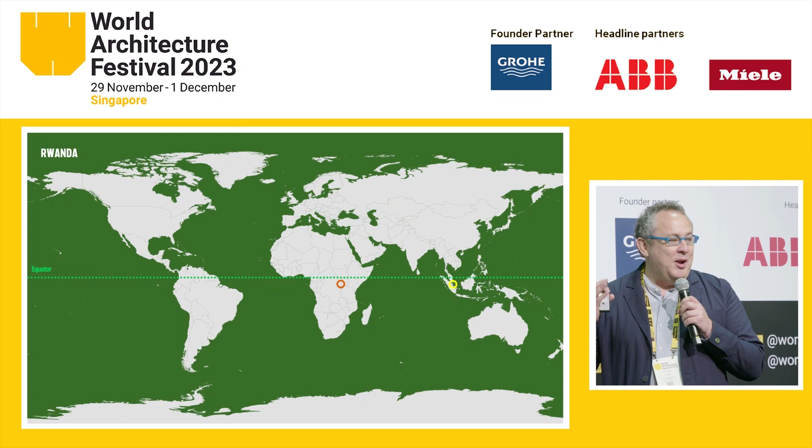So just a quick reminder of where Kigali is. It's on the same latitude as Singapore, but at 1,500 meters up, it enjoys a beautiful climate where you can naturally ventilate all year, with a 20 degree diurnal average temperature over the year. It's a country of 1,000 hills, Les Mille Collines, effectively a series of very valuable plateaus, some challenging slopes to build on, and then at the base, a series of protected wetlands, which are stunning natural habitats of bird life and plants, and support some agriculture. The City of Kigali itself has 11 of those hills, one of which we've been given to master plan as part of the Green City Kigali.

And so when you look at that global need, let's have a look at the local need. Rwanda is going to develop up to 2050. There's a government plan to get there, and its population will double by that point to 22 million people. And most of those will be going into the 3 or 4 urban centers within the country.

It contributes 0.003% of global greenhouse gas emissions, yet it suffers some of the worst effects of it. It already has extended dry seasons. It already has terrible flood events. It's landlocked, and it has limited resources to produce construction materials. Anything that gets brought in is massively expensive.

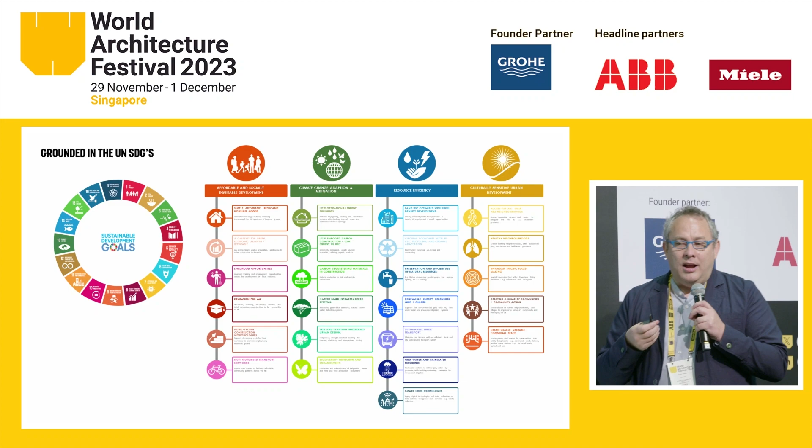So the first part of the project is to develop a master plan for 600 hectares. The hill itself, Kinyinya Hill, is occupied by a mixture of informal and formal settlements, some planned housing estates, informal and formal infrastructure. So we've called this a bottom-up approach to rapid urbanism, and part of that is looking at what the assets are on the hill that we can use, amplify, and develop from, rather than a carte blanche approach.

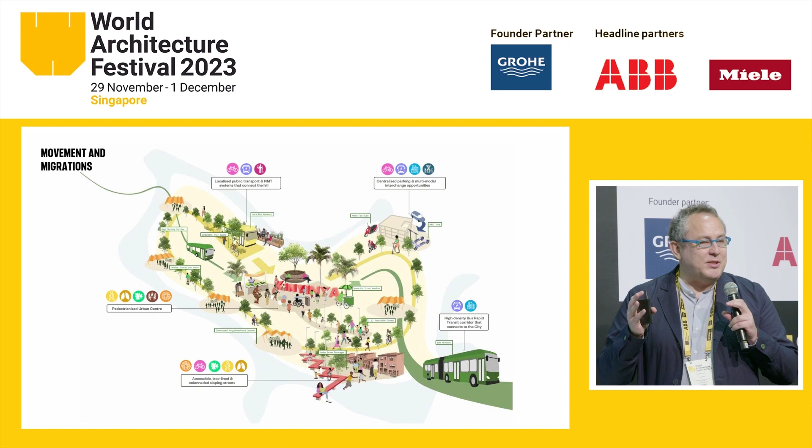So this is looking at movement and migrations. There's a road network that can be established to create what we call a circular bus route around the hill. We have a very challenging opportunity to put a BRT through the site, and again that's part of linking it back to smart cities. So finding the land between all these complex land ownerships that we can take a 30, 40 meter right of way for a BRT route through the site is very challenging.

And then this sets up a series of sub-communities across the hill. So the hill is going to have 170,000 people on it, so it's seen as one centre but also sub-centres. And so this is one of those, and there's commercial activity activated around the transport nodes in each of these.

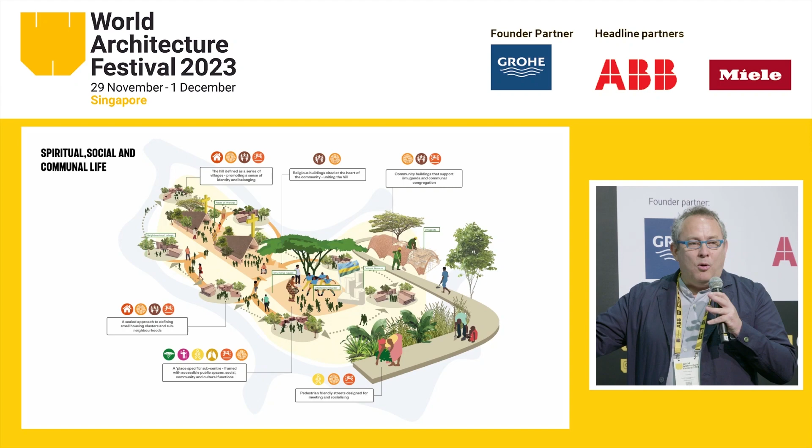Next one is spiritual, social, and communal life. Where do people get together? So at one scale, this is around creating pedestrian-friendly streets where people can meet. It's around creating community centres in each of these sub-centres. It's around creating religious buildings along the spine of this hill where all these different communities can come together. And here's a view of one of these local community centres where people get together, for instance, to plan what they're going to do for the Umuganda process.

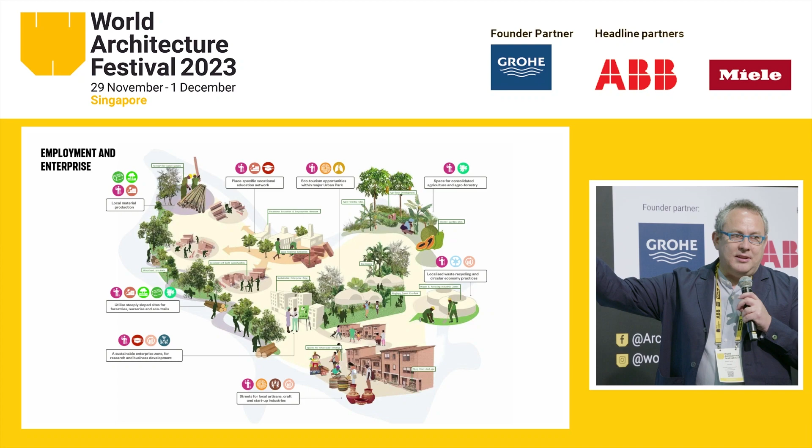Employment and enterprise. So the idea is we keep as many people working on the hill as possible. We've established space standards to support 55,000 jobs, from light industry through to small entrepreneurial spaces within the different settlements. But it's also looking at the assets on the hill. There's some forestry that can be used for intense agroforestry. There's some of the best clays in Kigali on the north side of the hill, so we can establish brick making and construction technology as well.

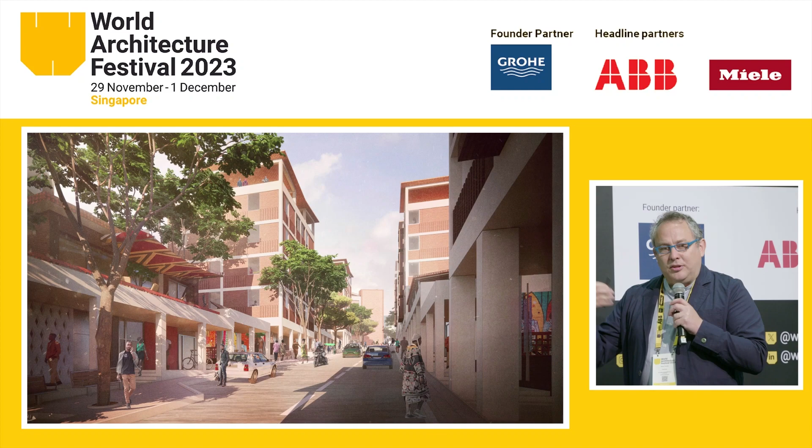And this is that idea of a street-based urban development with colonnades, spaces that can be anything from someone wanting to sell fresh water or milk through to cafes, through to using them as bonded warehouses almost.

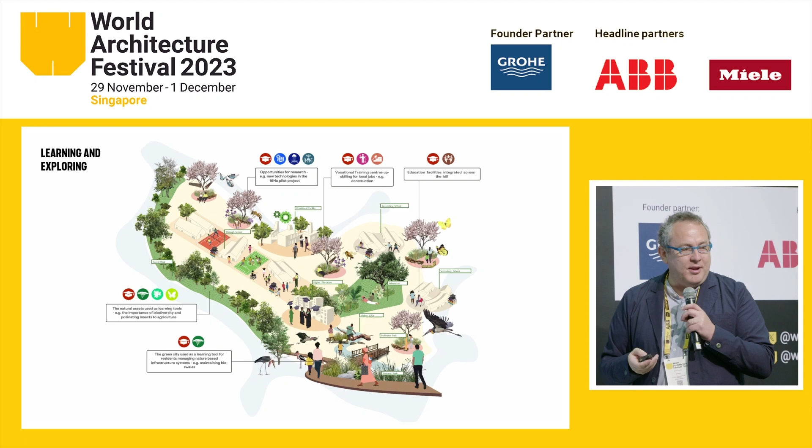Learning and exploring, making sure we have enough schools is absolute fundamental on this site, but it's also the nurseries, the primary schools, the TVETs, the universities. We have an incredible biosphere on the site, the Deutsche Welle site, which hasn't been touched in tens of years, and it's just been allowed to grow, and it's the most native forest in the whole of Kigali. So preserving that in the middle of the site as a research piece for the university is super important to our proposals.

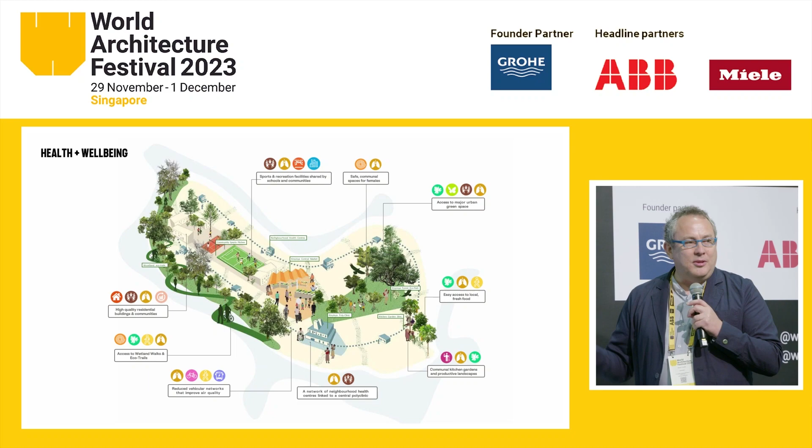And these schools are not just schools, they're community centres. They bring different neighbourhoods together, and again, there's out-of-hours use for adult education. Health and well-being, making sure we have the hospitals on the site, again to support that social infrastructure, but also that whole story of people walking and cycling to work.

And making sure all of the places that we create through the sites are pedestrian friendly, and that people can navigate what are between 1 in 6 to 1 in 8 slopes in a casual way.

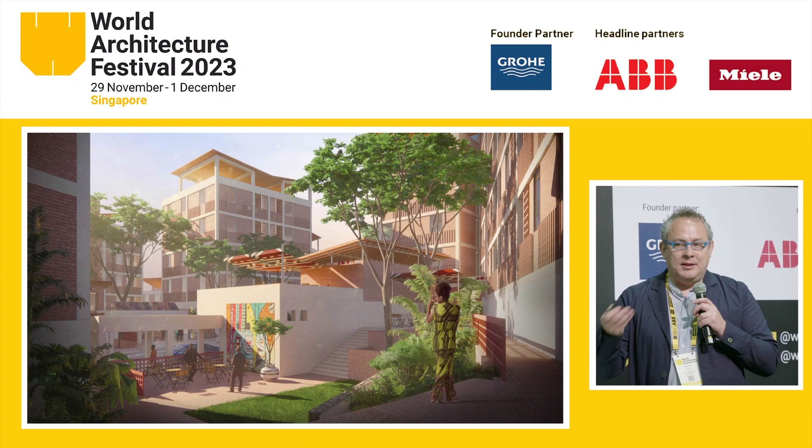So overlaying that as some sort of structural pieces, we have green infrastructure. This is around blue-green social networks that double up as agricultural spaces, but also deal with floodwater on the sites and extreme weather events, and how we attenuate stormwater running off the sites into natural detention basins at the bases.

There may be something about how smart cities can be applied to this, so that Umuganda process may be about, for instance, desilting some of these bioswales next to roads as part of the community action, replanting them.

This is the eco park I talked about at the middle of the site. The BRT, it's not just a hard highway through the site, it's actually a linear park that links one end of the hill to the other.

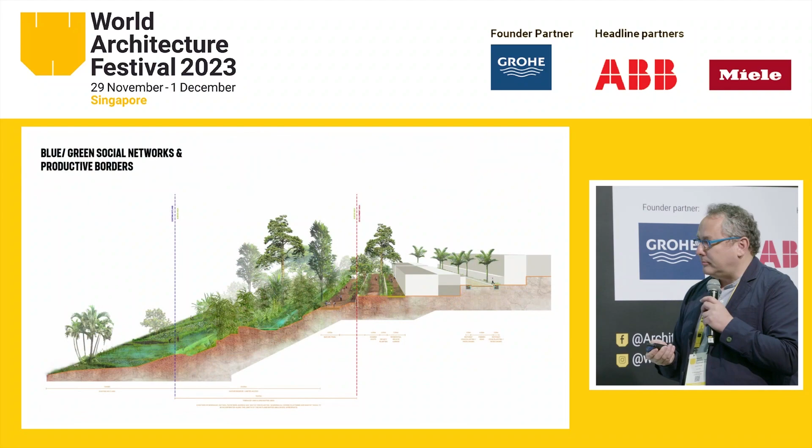And then what we call blue-green social productive borders. These are strands of green that run through the master plan and help define these individual settlements. But they provide the peri-urban agricultural space. They provide the space that we can slow stormwater down in. And they're all overlaid over the natural conditions on the site, so they exist with the existing hydrological routes.

And then we have a series of layers of the master plan, and then the master plan itself. So we're at a point where we're consulting with the city of Kigali on this and the adoption of that. Part of that master plan is setting out - the city has a sort of smart cities agenda with a series of checklists. Part of our submission, over a sort of 400-page master plan, is how this can be developed over time and delivered up until 2050.

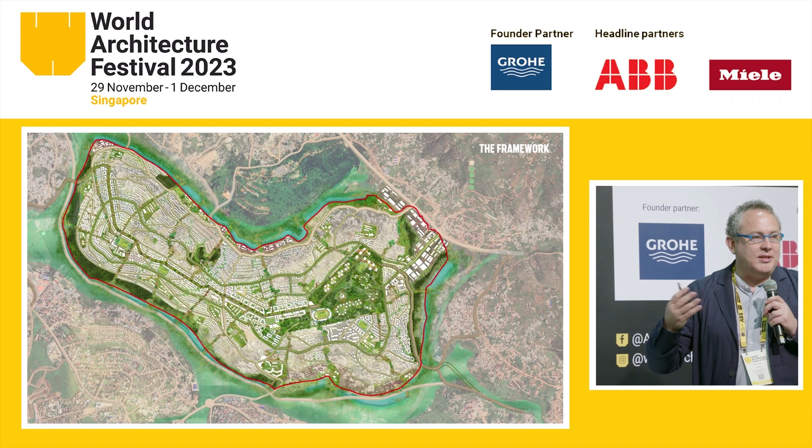So I'm going to stop here. There's a bit more to the presentation, but I think we'll save it for tomorrow.

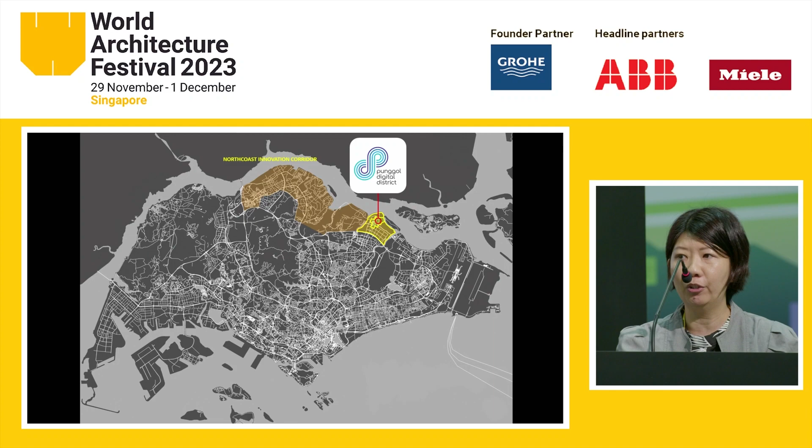Today I'm presenting on the Punggol Digital District Master Plan, or PDD for short. PDD is developed, or rather the district is part of the North Coast Innovation Corridor that is planned as Singapore's new decentralized economic center. PDD is developed as a 21st century prototype of regenerative and resilient innovations.

It is the first of its kind to be implemented in Singapore at such a scale. The 50-hectare master plan embraces a systems thinking approach that holistically integrates its various parts to prioritize people, nature, and sustainability. It brings together a business park, a university campus, key public spaces, district-wide services, and major public transportation nodes.

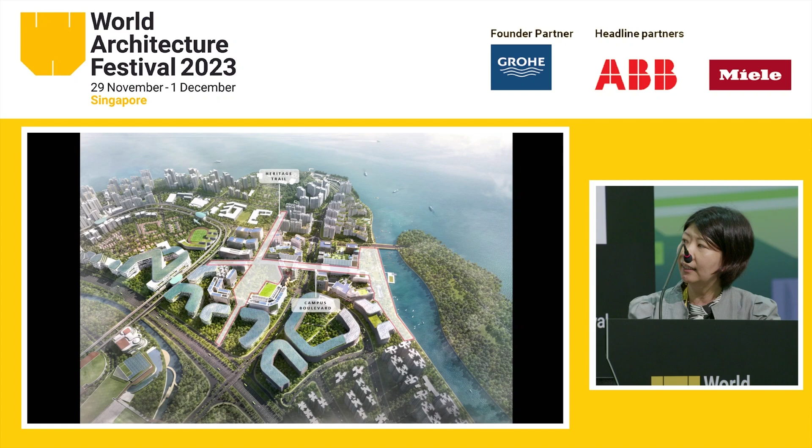Two key pedestrian spines stitch together the entire district. In the north-south axis is a 1.3-kilometer tree-lined heritage trail, this is the former Punggol Road that will become pedestrianized. In the east-west axis is an 800-meter-long campus boulevard. This is a pedestrianized street as well, activated by social nodes and shared amenities leading towards the waterfront.

Surrounding the district is a mix of public and private residential estates. And right in the heart of PDD is a public park that we have conserved.

The district is imposed with a technical height control limit, and to turn this constraint into an opportunity for sustainability, we have developed this innovative inverted skyline parti. This is the reverse of a traditional bell curve skyline, which tends to be problematic for solar collection.

So the inverted skyline establishes a common roof datum across the entire district, and this creates a contiguous surface to optimize productive rooftop systems. The elevated buildings also help to keep the community spaces below open and breezy, enabling better engagement with the park.

The inverted skyline is further organized based on a three-dimensional layered planning approach, and the different uses are integrated vertically, which optimizes land use and generates vibrancy. Resiliency is also built into the master plan by integrating rooftop PV with urban farms to test bed Singapore's solutions for energy and food security.

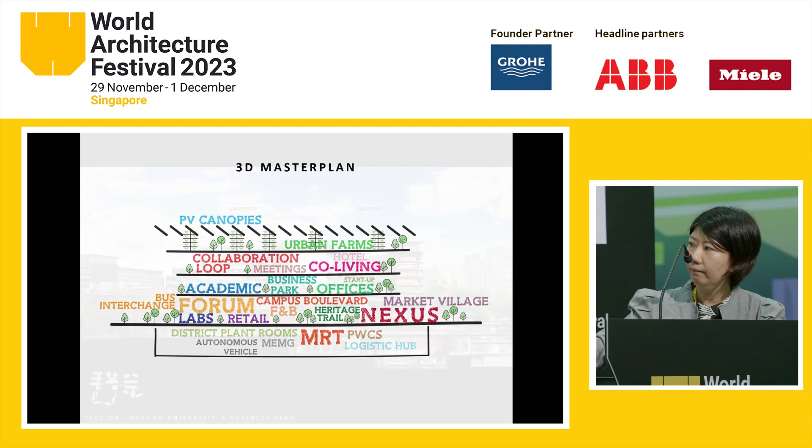The layered strategy places the district-wide services underground, and this segregates vehicles from pedestrians to create a car-free, fully walkable district. This section shows the 4 layers of the master plan, beginning with the vehicular and servicing layer below, overlaid by the community park layer. Next is the office and academic layer, and finally on top we have the sustainable tropical umbrella layer.

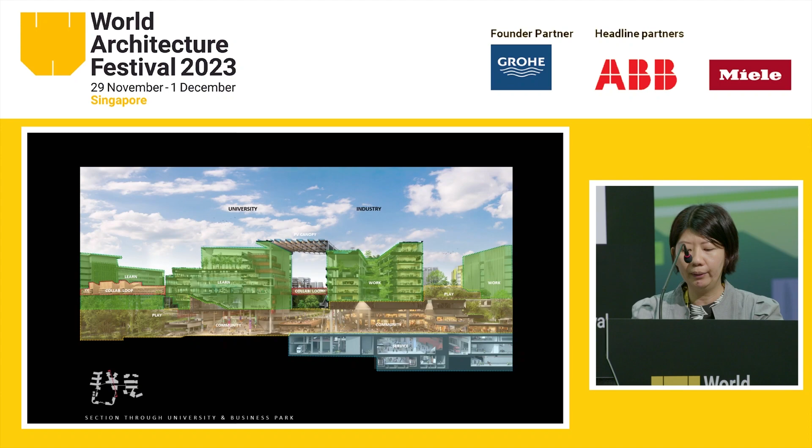Let me spotlight some of the key spaces in this section. On the left is SIT, and on the right is the business park. Within the basement at the bottom is the underground train station. Over that is the Nexus, a civic space that is linked to SIT's forum on the left. Mid-level linked bridges connect the various garden, work, and study spaces, and right on top we have the rooftop PVs.

I'll now like to focus your attention on the shared pedestrian street in between SIT and the business park.

Oh, sorry, one back.

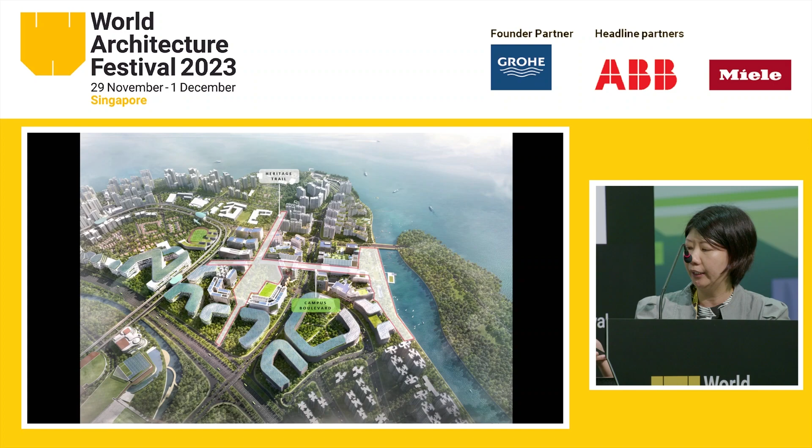This is the 23-meter wide landscape campus boulevard, a shared mobility path activated by commercial and community spaces. The campus boulevard starts with an urban plaza, activated by a bus interchange, a hawker and community center. It also intersects with the Heritage Trail.

The boulevard then transforms into a land bridge over New Punggol Road. It features sheltered public spaces, commercial and community amenities on both sides. Its endpoint is marked by a promenade plaza that engages with the waterfront market village.

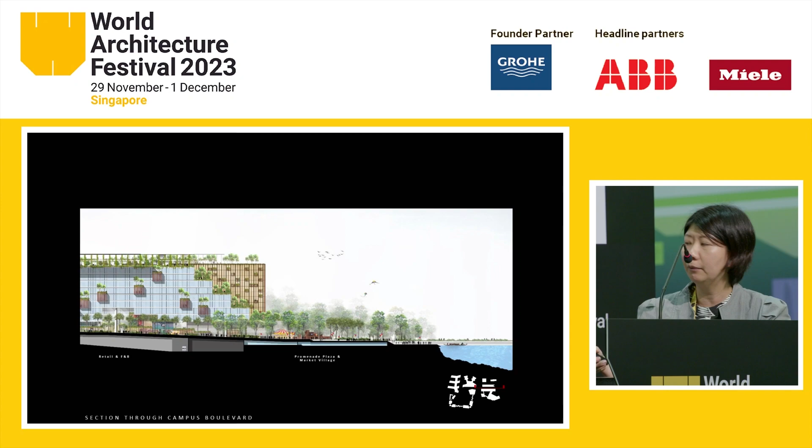I'll now take you on a walkthrough of the key spaces of the boulevard. This is the urban plaza that anchors its western end. It receives people from the light rail, the bus interchange, and the surrounding residential estates.

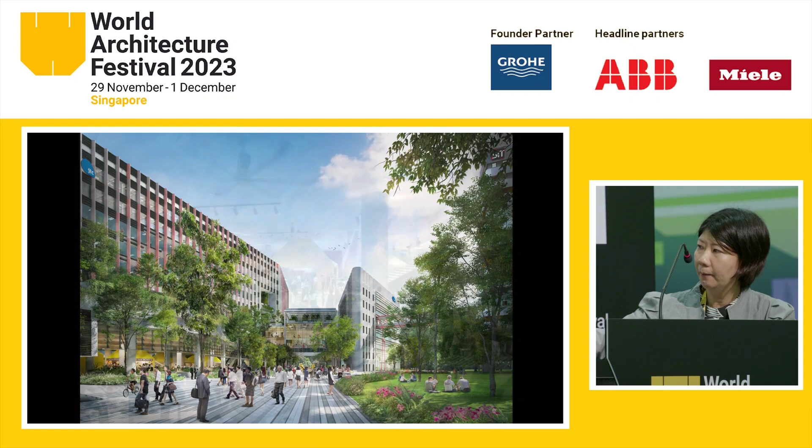Seen on the left side is the community hawker center, and this is the interior view of it. It is designed to be bright and breezy and will be operated by a public local agency to provide affordable food for the masses.

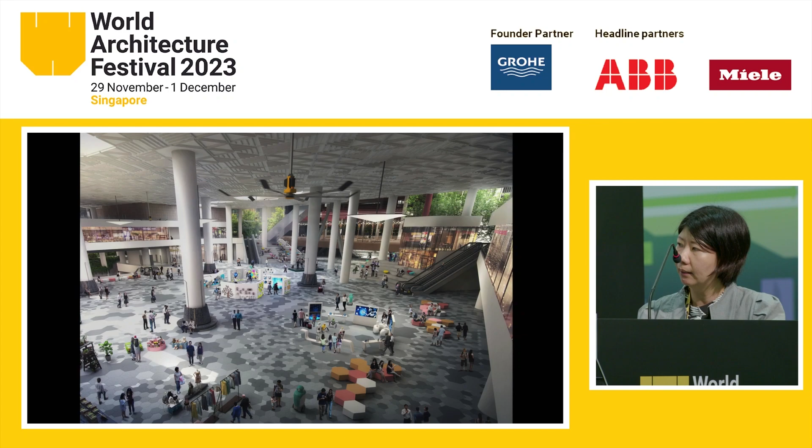Moving along, the Nexus is the civic space within the business park. It is a sheltered 24/7 open public space above the train station, activated by retail and F&B. The Nexus is linked to the SIT Forum, which is also a sheltered, naturally ventilated event space.

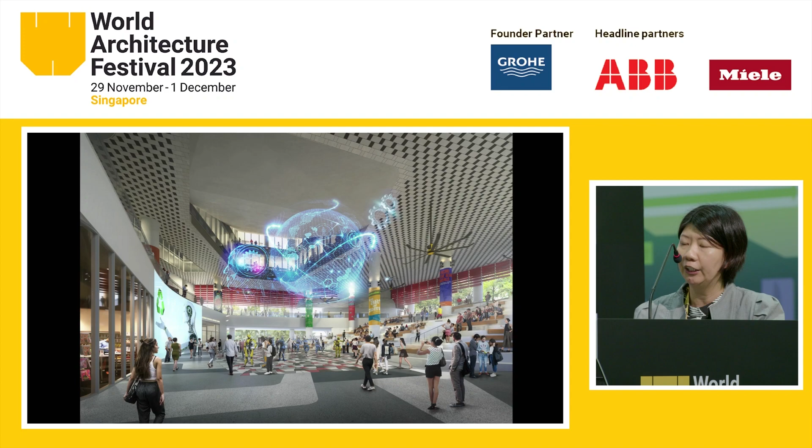Roof canopies are extended to shelter parts of the boulevard, making the outdoor spaces thermally comfortable. And finally, at the east end of the boulevard is the destination market village along the waterfront.

Now, the 3D master plan is facilitated by its interconnections, which is also fundamental to enabling the smart district. Vertically, escalators bring people quickly up into the buildings, which reduces the demand on lifts. Within the buildings, social amphitheaters promote active mobility by encouraging people to take the stairs.

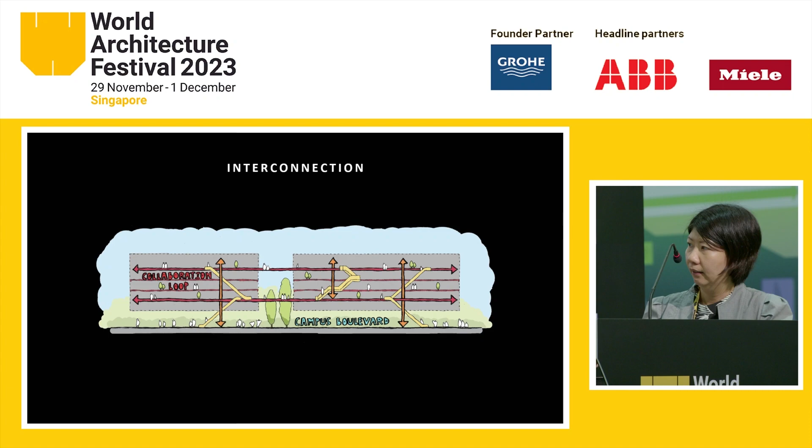Horizontally, an elevated pedestrian loop named the Collaboration Loop is introduced at mid-level to link up the entire district. The loop fosters a culture of interaction and exchange, and also supports a physical swapping of spaces between industry and academia.

This extended section shows how the escalators take people up quickly from the community park level to the Collaboration Loop, where social amphitheaters invite them together.

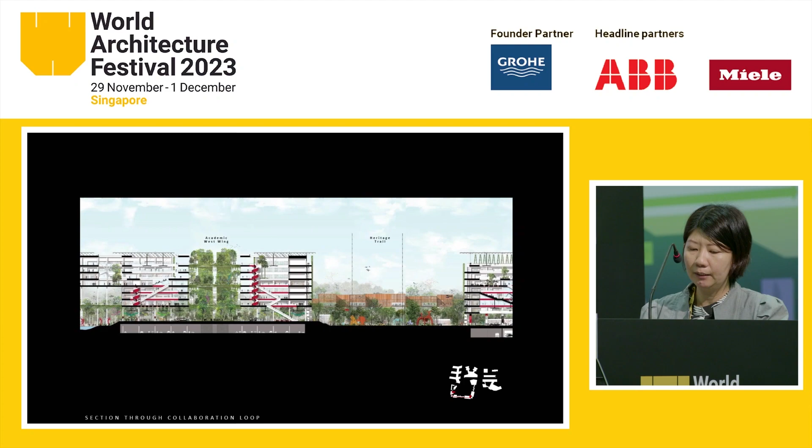Here, the loop crosses over the Heritage Trail, where there are study spaces that overlook the park. Link bridges connect SIT's campus and JTC's business park, fostering partnerships.

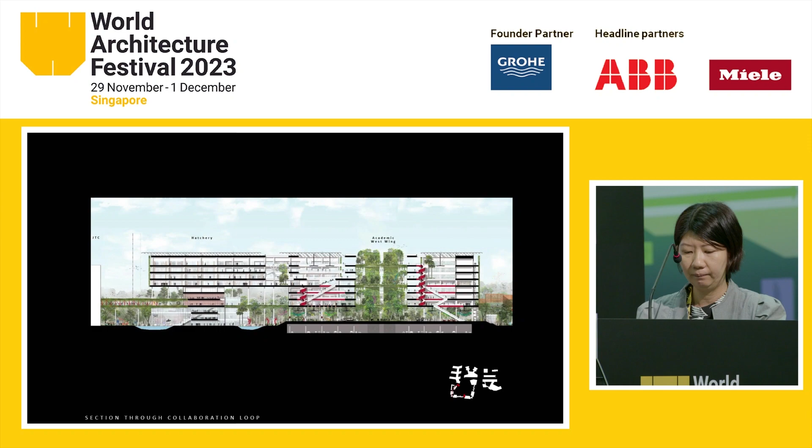PDD adopts a superblock and public transport-oriented approach. Secondary roads are limited to pickup and drop-off points only. All other roads are tucked underground, and as a result, vehicles and pedestrians are completely segregated.

And all of these are being monitored by thousands of smart sensors and managed by a digital twin of the entire district.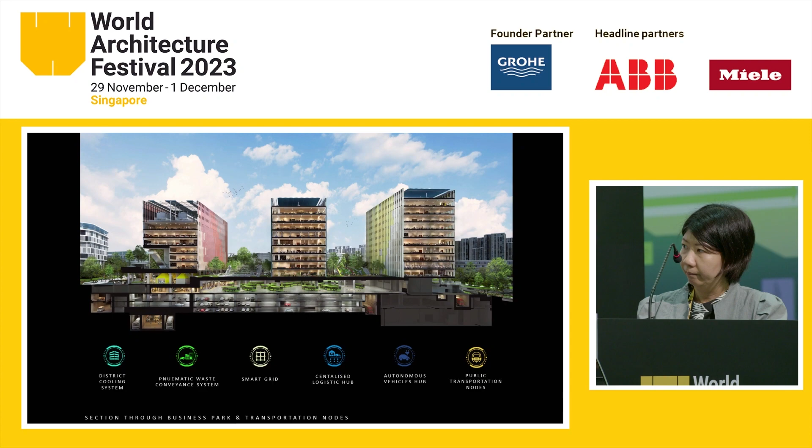The master plan also considers the future of mobility. Infrastructural provisions are made for smart logistics hubs, autonomous vehicles, and drones. Last mile facilities are also catered for personal mobility devices and bicycles.

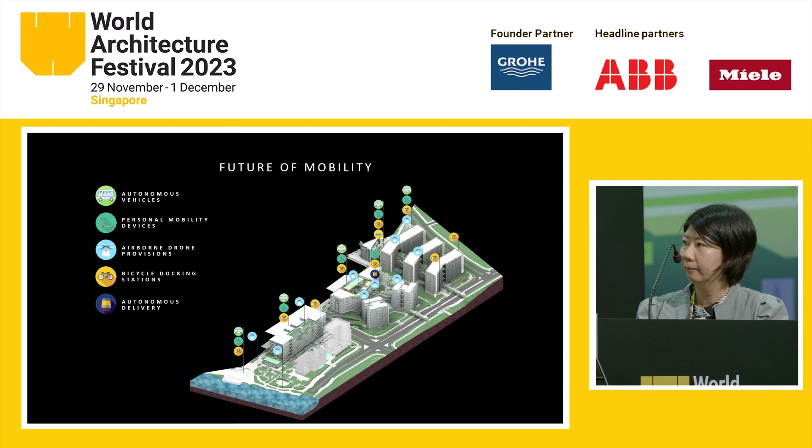Now, to balance density with greenery, the master plan conserves existing trees and achieves a 100% green replacement. PDD's green and blue spaces also serve as ecological stepping stones for wildlife.

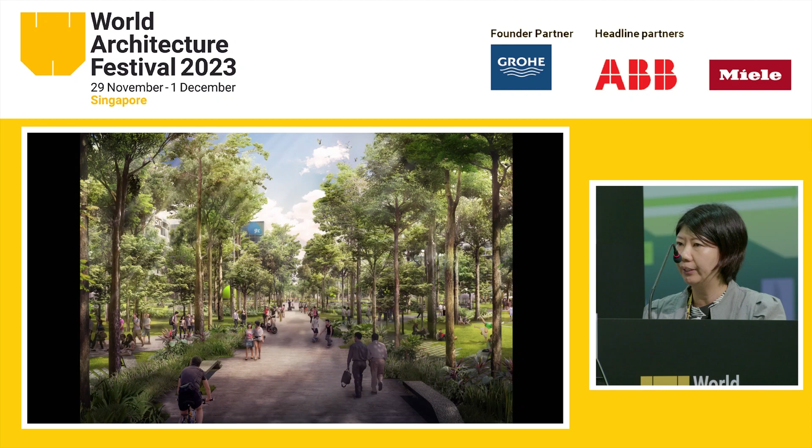The district's main green spine is this heritage trail that opens up to the community park, and its 50 hectares worth of landscape performs important ecosystem services such as reducing solar heat gain, sequestering carbon, releasing oxygen, and removing air pollutants.

This is the canopy walk over the heritage trail, which has informal study spaces that overlook the park. The master plan also caters to the future of working and learning by providing informal and collaborative spaces within lush garden settings. These are all designed as naturally ventilated biophilic areas to minimize energy consumption.

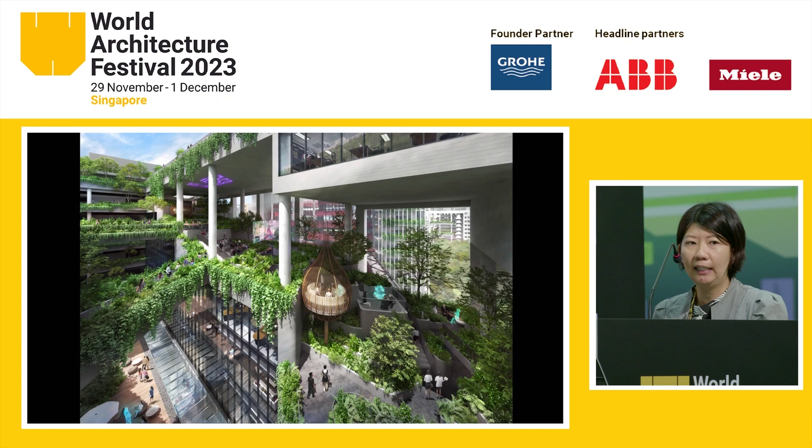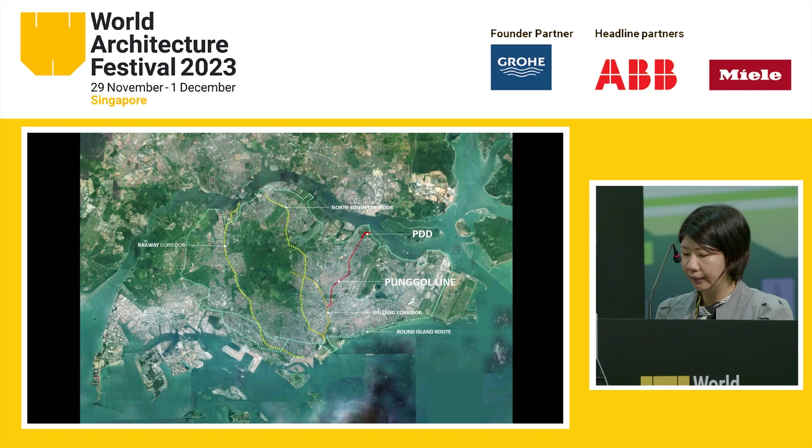The Punggol line will serve many residents within the northeast area of Singapore. The idea is to utilize the typically barren spaces underneath existing viaducts and transform them into lush ecological connectors integrated with mobility paths that will extend the regenerative impact of PDD's master plan.

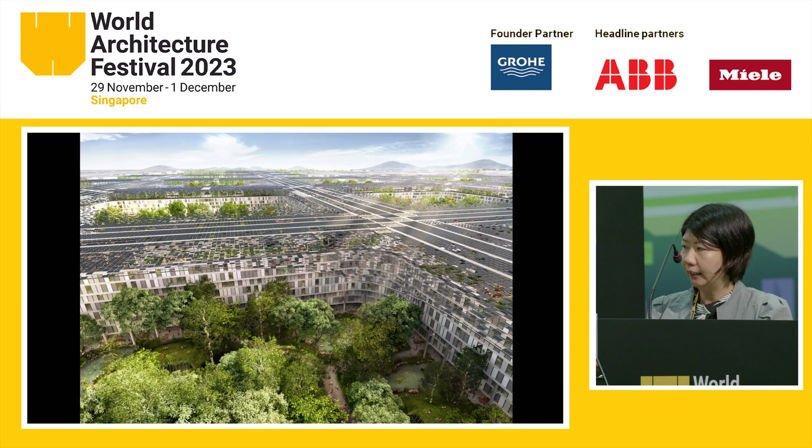Collectively, these forward-looking strategies position PDD as a 21st century prototype of regenerative and resilient innovations, making it a catalyst for change towards a people-centric, nature-positive, smart, and sustainable future.

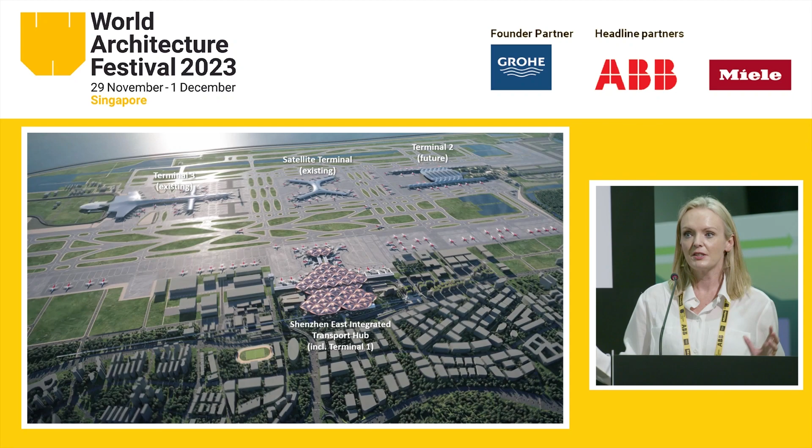The brief was not only for an airport terminal, it's actually a very large transport interchange - high-speed rail, metro, etc. - and also a 119-hectare master plan to either side of the hub, plus the airfield planning. So everything is a whole integrated planning of airside and landside.

Shenzhen is a really young city, literally only 40 years old, where the population has grown from 0.3 million to 12.6 million. It also sits within the context of the Greater Bay Area, with a population of 70 million people, mostly recent immigrants from the rest of China.

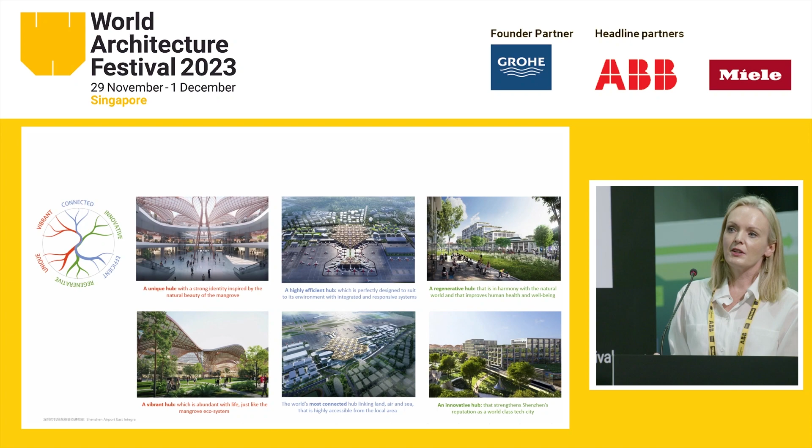But this also needed to be integrated with technology. We have 6 key drivers to the project: being unique, with a unique identity; highly efficient, integrating transport modes but also efficient in materials and resources; a regenerative hub, regenerating the whole east precinct, not just the airport site itself; abundant with life; the most connected; and of course innovation. So it's not just a multimodal transport area, it's also a science and technology district.

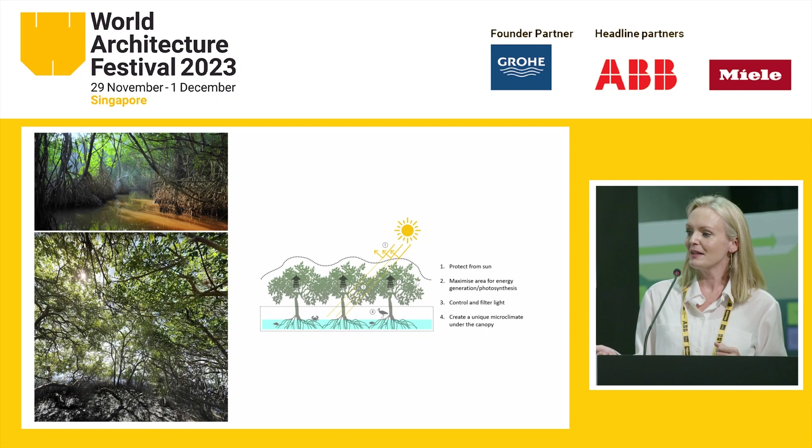Our inspiration came from the mangrove trees - not just the shape or form, but also the way the very thick mangrove canopy helps create a unique ecosystem underneath it, creating shelter for many different species of plants and becoming a kind of cradle of life. We saw this as a starting point for our design - you can see here this undulating roof inspired by mangroves.

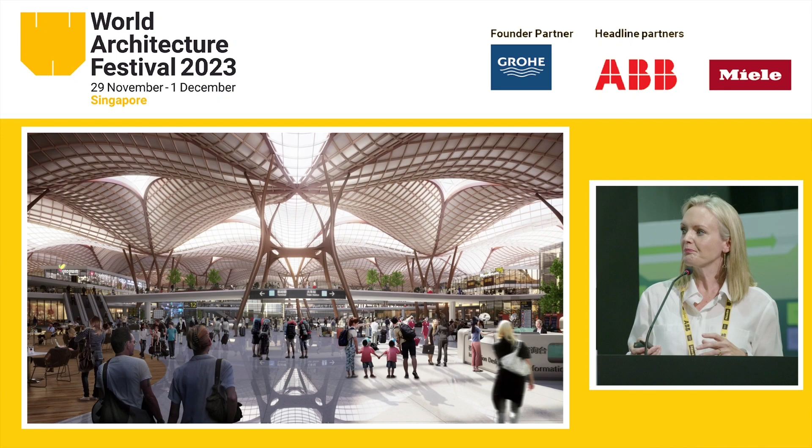So we use this idea of the mangrove roof. The idea, although it is quite an extravagant form, it's very beautiful in its curvilinear nature. It's also highly efficient - by using this double curvature and a modular approach, we were able to use the same module, giving us efficiency in terms of economy of scale.

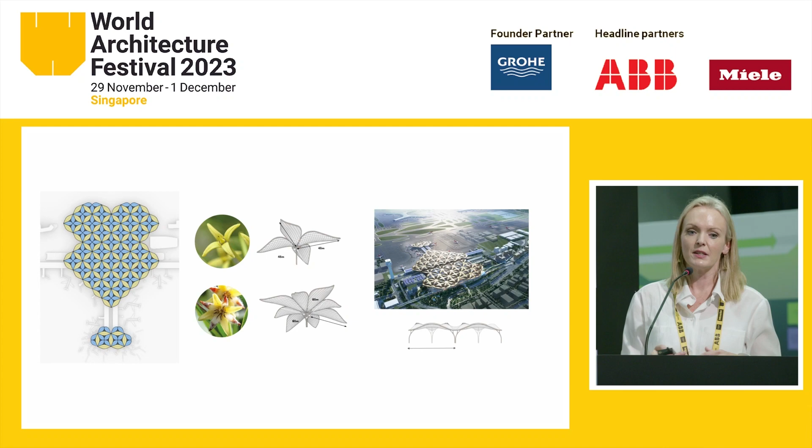But also, having quite large spans meant that we could free up the ground plane and plan it independent of the roof. This gives this idea of future-proofing, so in the future, as things need to move around underneath the roof, we have the flexibility for future development.

So really limiting the conditioned space, most of the space is actually this third space. It's very tempered, it's got beautiful daylight, but also protected from the extreme heat. And of course Shenzhen's a very lush city, so we're introducing landscape everywhere. You can see here in this image...

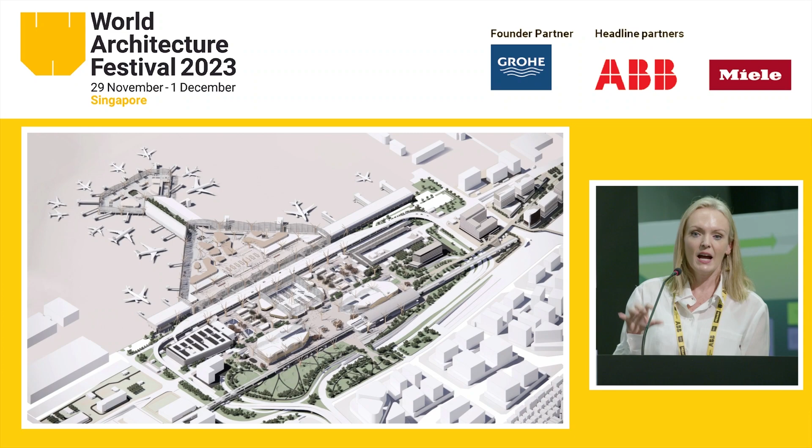You can see here by this image, the roof almost covers this whole area here, but it's actually a series of individual buildings under the roof.

So the planning, both vertically and horizontally, was extremely challenging, but we've created this seamless transition between all these different transport modes. I'd also mention the management of the project and stakeholder management with all the different government bodies and interfacing projects built at different times was also extremely challenging. And that's really how cities are built.

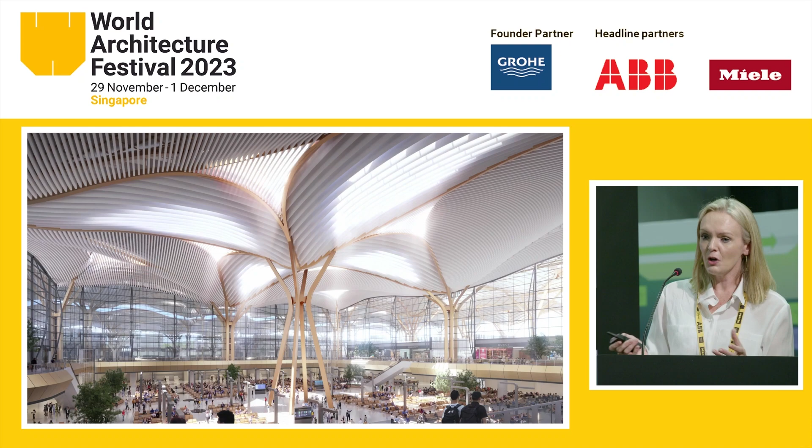This is an image of the high-speed waiting hall. It's underneath the mangrove roof again, but we're using different ceiling treatments, soffit treatments, to moderate light. And it's not only the area under the roof, we've also got nearly 120 hectares of master plan around this site. To the right of the image, we have...

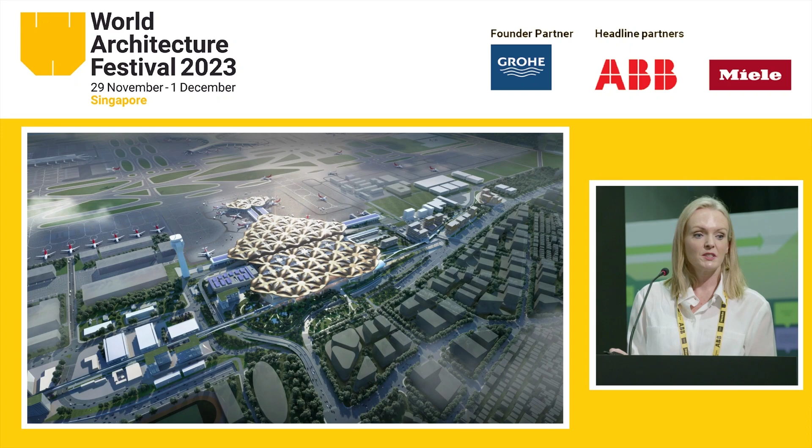Science and Technology Precinct, all linked together by these ecological corridors that connect the site. To the bottom of the image, we have a cargo hub and aviation functions, along with some community facilities for the workers on site as well. So we've got 20 other buildings on the site, another 380,000 square meters, all knitted together by these ecological corridors that run through the site.

Shenzhen is a garden city, very much focused on landscape, actually quite similar to Singapore in a way. But one of the key things in Shenzhen is this idea of ecological corridors, the mountain to sea corridor, where the ecology of the mountains permeates through the city, through these planned ecological corridors right out to the sea.

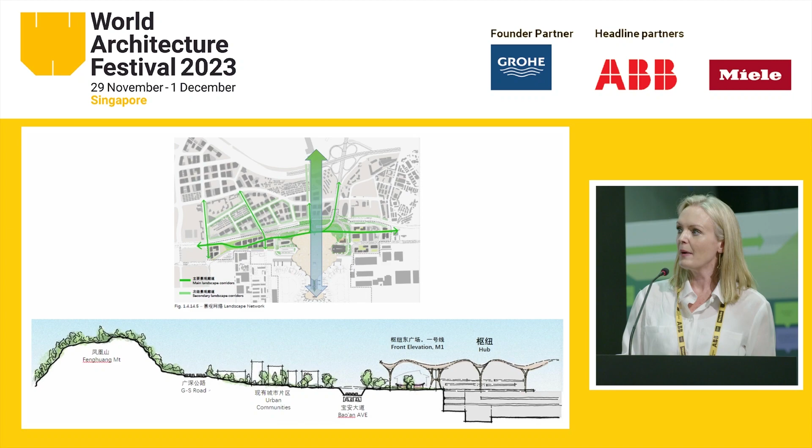So our building actually sits within these ecological corridors, and it terminates with the airport in front of us. But we tried to draw this idea of the ecology from the mountainside all the way through into the building, and the landscape permeates right under the canopy.

And this is an image with the lid off, so the roof off, so you can see the extensive landscape.

Shenzhen is also a sponge city, so they've got some great rules around water attenuation on site and water management. So we started to use this idea to make the water a feature on the site. You can see the water actually permeates all the way through the site from north to south, and you can see the amount of landscaping on the site itself.

The other pretty extraordinary thing about this project is it's right beside a residential area. So it's one of the only airports in the world where you can take your suitcase from your home, walk across the road, and get onto a plane.

So when we talked to our client, who's the airport chairman, he said to us, what is the future of airports? And one of the things we said is how do you create an airport that's properly integrated into a city and not a standalone thing isolated by major infrastructure roads? This, because of its location and its integration with an existing city fabric, is really successful for us, because you have this direct connection back into an existing community, and that community then populates this new precinct.

We've got retail, we've got culture facilities, we've got this new science and technology hub. So already we know, or we hope, that this precinct will be lively and activated by just the local community as well as the people coming into the site.

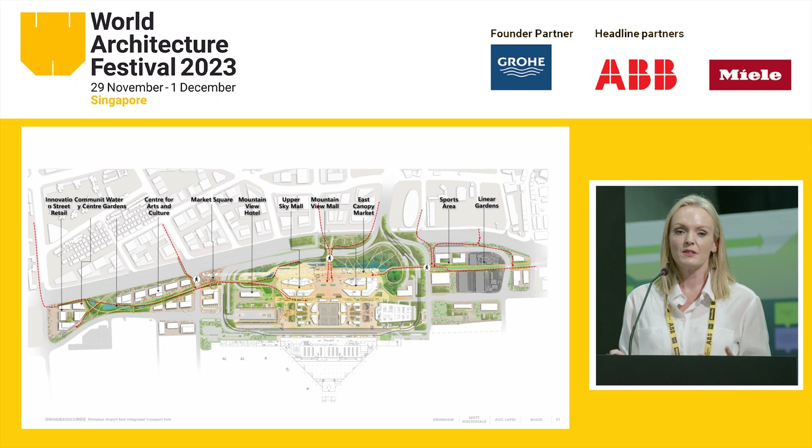And that's an image then of the Science and Technology Precinct, using these ecological corridors to connect the site all the way through. And then I'm finally going to leave you, if I have time, with just a video when we walk through the building.

If it will play after all our technology disasters so far. Let me see. Oh, here we go.

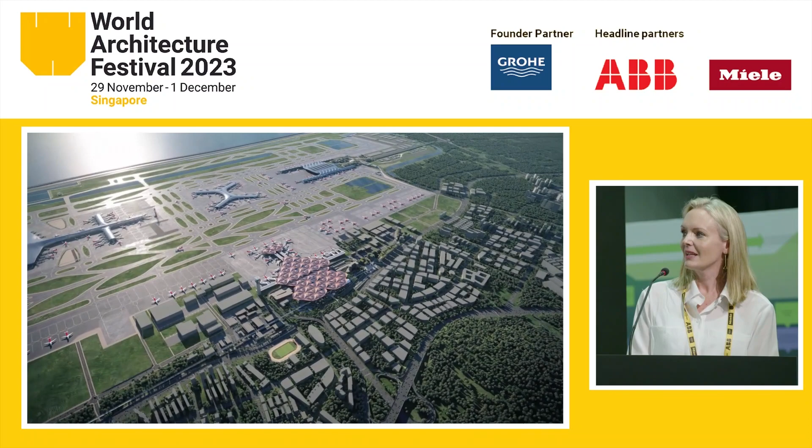So you can see the proximity of the hub and the master plan right through to this existing area. And then we're looking down, we're coming from the roof, coming down, looking into the East Plaza, which directly connects across the road to the residential area.

So it's a big public plaza, and it's kind of the main entry point into the building. Coming down over the canopy, looking through this whole retail precinct, the bus station, and underground, then you've got the high-speed rail. Looking back over the piers of the airport, where we've got nature everywhere.

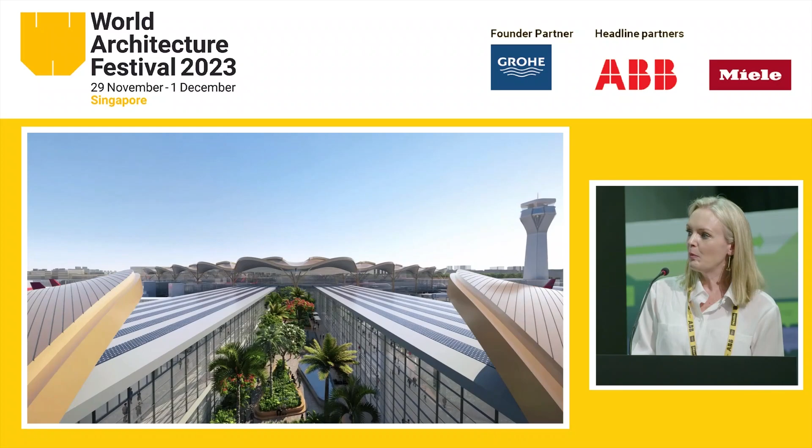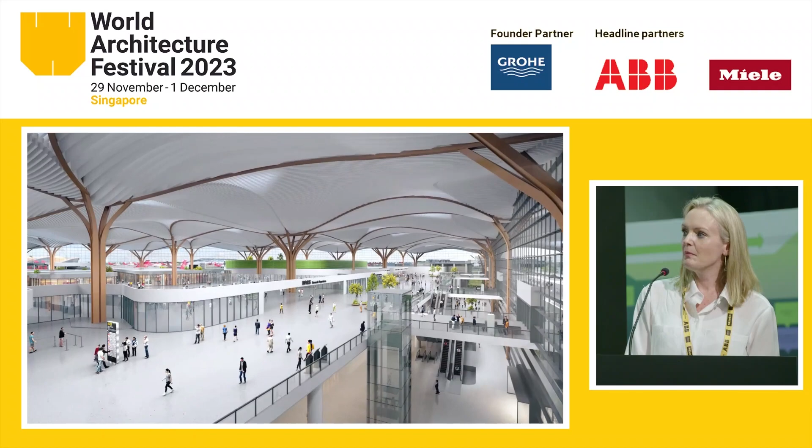Everywhere we've got courtyards. Almost from every point in the site, you're visible—you're looking into a garden or into nature. This is the main check-in area for the airport and the security.

Coming to the terminal, each of the spaces, even though we've got this mangrove roof, each of the soffits is slightly different, defining the different spaces, although we have this uniformity throughout the site with the same roof. And again, in the terminal, we've got nature everywhere, including some mangrove gardens as well.

This is the high-speed rail waiting hall.

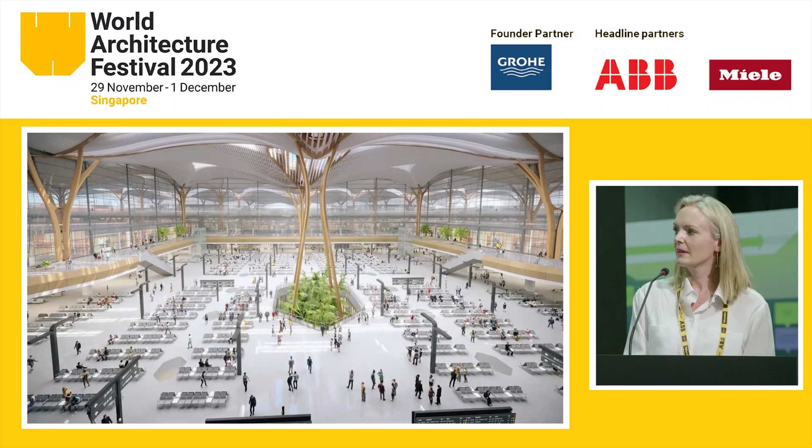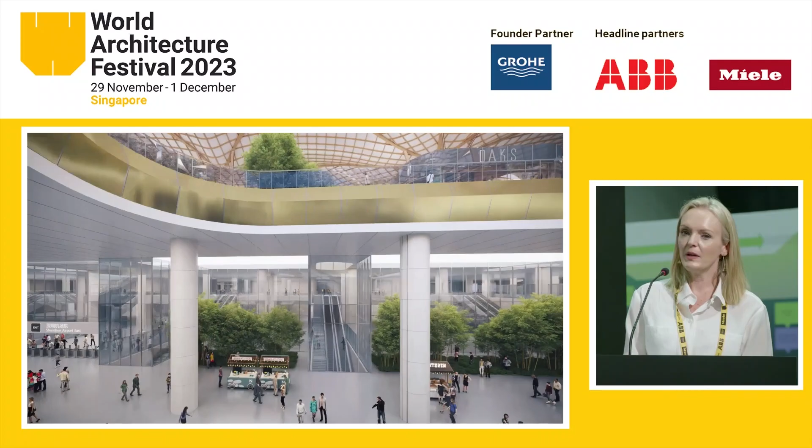And coming down from the sunken courtyard to the drop-off area, right the way up through these voids through the retail precinct, you can see this kind of idea of a whole village underneath this mangrove roof. And then the sunset view to end.

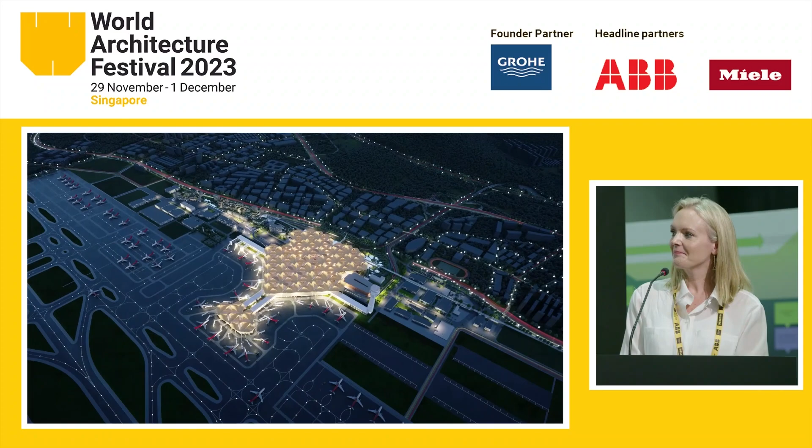Thank you very much.

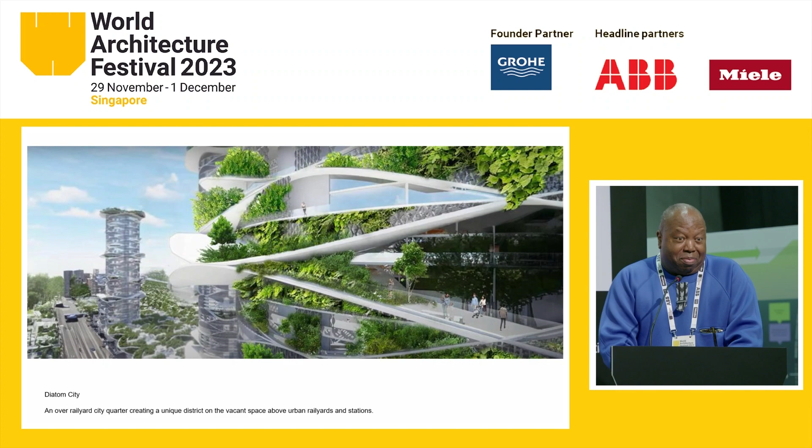The principle behind this is that one of our clients, a developer, is very interested in what you can do with the vacant space in cities. Over railway tracks, clearly, is a large scar that cuts our cities apart and divides communities. The question is: is it possible to restitch that and make a profit? Or is it possible to do something rather special with that?

We kind of had a look at the sorts of elements which inspired us—terraces, the way in which you can cover one surface of land or submerge other kinds of activities, and the notion of a diatom.

Alongside that, we looked at a series of historic principles for the way in which you make enclosures and groups and community housing. In this case, we looked at the Gurunsi and we looked at Chinese roundhouses to see what communities could be built at both low and high level.

An interesting factor about the diatom is that it's really rather like a Pringle. You can stack them quite easily and structure those forms depending on the sorts of material you might use. Fashion's been using this for some time because of the textural quality, the fabric nature of it.

As these elements become three-dimensional, they allow for a different kind of construction using much of our rapid prototyping materials. We're using waste plastic, which has a bearing weight 2 to 3 times stronger than concrete, and whose reinforcement, using certain kinds of plastic, doesn't change in relation to temperature as much as steel. So there are some advantages to this particular notion.

So where did we look? We looked at Detroit, a city which had its center emptied through flight to the suburbs, looking at the sorts of people who were left behind and how we could re-enfranchise them without necessarily having to take over those vacant lots. So we looked at the station.

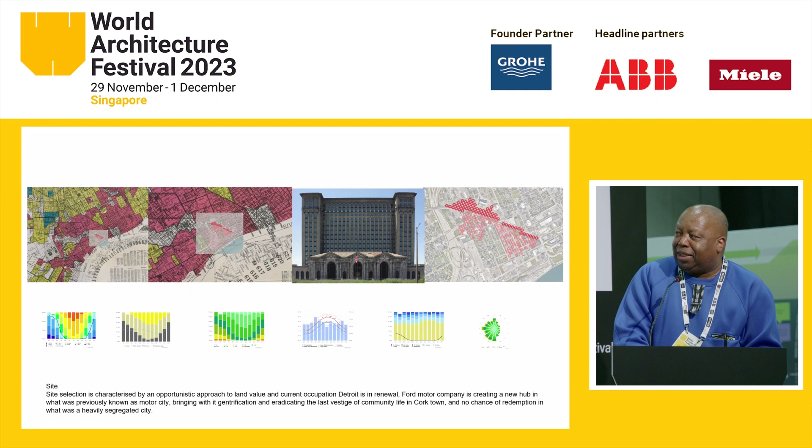I think you've all seen this. Those of you who've ever watched a Transformers film, it's a great place. But you can see the beginnings of our plan. Our plan is to use this covering and to draw air through and up through the site, using that as a form of part of the energy conscious element to what we're doing.

The station itself, you can see how large it is and what area it takes up. What could we do with that? Our notion: a series of structures based upon the roundhouse, structured in 4 to 5 layers, layered up in construction so that it became printed as opposed to constructed, using contemporary techniques which are becoming more and more prevalent, using the materiality that we talked about earlier.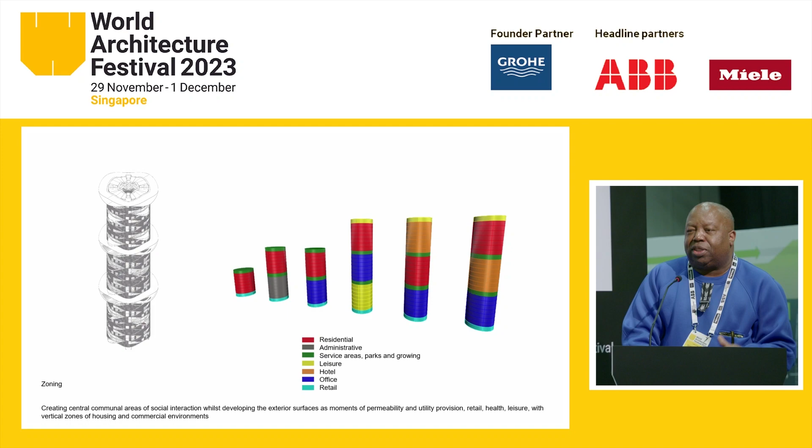The tall towers being for those who wanted a certain kind of view and also who could afford it, and the lower areas being for all of the amenities, facilities, and also for a range of different income levels. You can see how they become more complex as they go up, and the way they can be laid out for a range of uses.

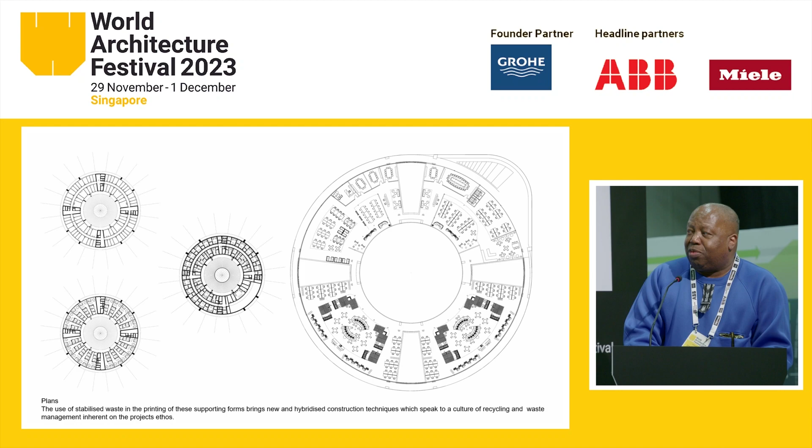We know developers don't like circular buildings because they're hard to let. But if you know what you're doing, you find that hotels are very happy to have them, and a number of other different sorts of businesses.

What do those forms make? What they provide you with is a series of terraced areas for leisure and other uses, and unparalleled views, and also energy collectors for a whole range of possibilities, including solar power and wind power.

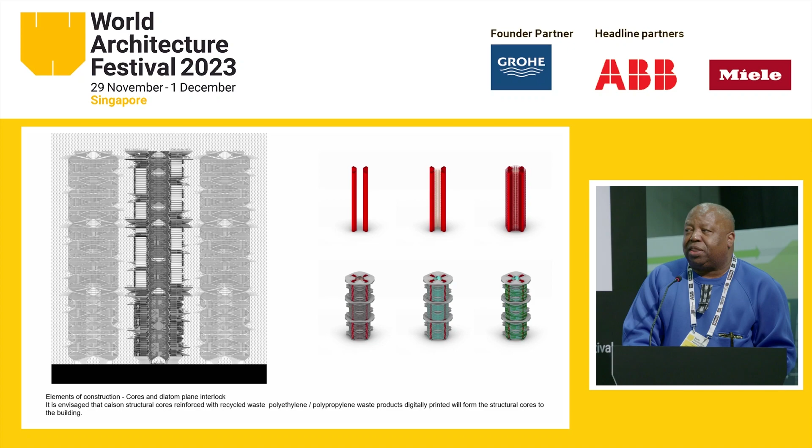The section through the building shows quite a narrow internal area, so the air moves faster and runs the micro-turbines that give you the general power for the buildings.

Looking through, you can also begin to make some interesting notions of small businesses. You can grow your own crops, you can have your own kitchen garden, and on top of that, you can begin to have small businesses that deliver food by drone. Those sorts of notions should really be built into our kind of contemporary understanding of architecture.

Not simply yet another monolith after monolith, yet another canopy after canopy. Our canopies are alive, they're microclimates. You can see the range of levels possible with this particular kind of form.

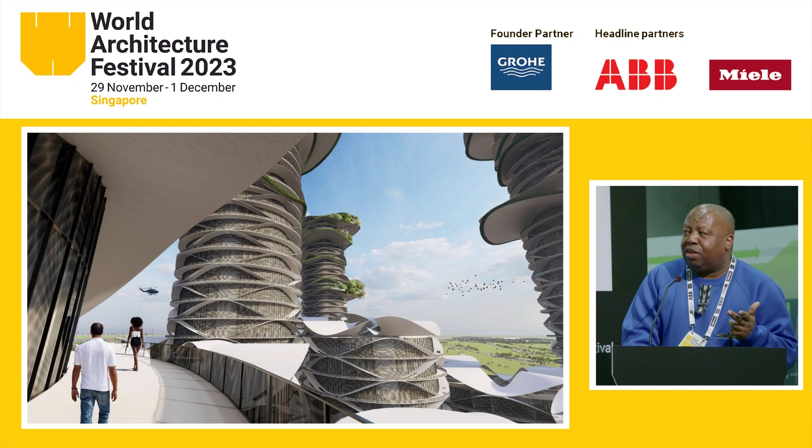Moving between them, you have a series of surfaces that deliver to you leisure, work, pleasure, farms, and at the same time, at the low level, you can see the beginnings of the internal canopy, which is a mesh that generates energy.

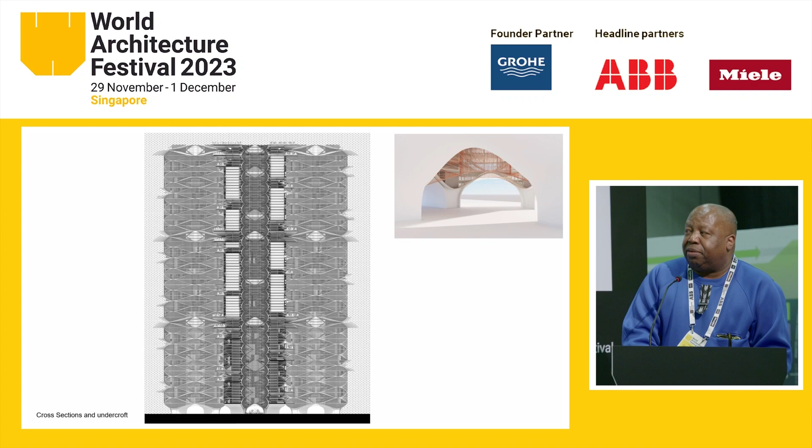Sections through the apartments are really quite simple. On the far right-hand side, you can see the turbines which are generating the electricity, but we're going to be the first building that uses individual condensers for each apartment.

The price is going down dramatically, so everybody will produce their own water. First building without a centralized water system, has its own local water. This is quite interesting, especially in terms of safety, because every flat has its own sprinkler system, and every flat generates it at source.

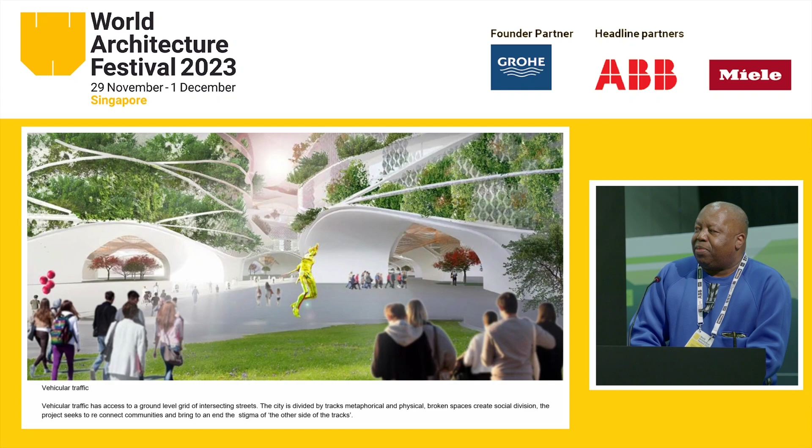A little bit more about the nature of that mesh and how the main structure works, going through to what it might be like to inhabit those spaces for leisure and pleasure.

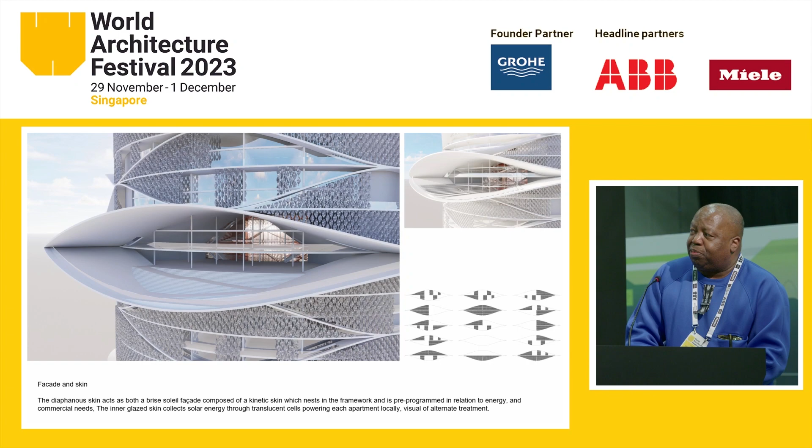The skin itself can be pulled back, either to provide or to remove the energy production that you need. Could almost be rented out, could be an income generator. But overall, you have an interesting landscape, not unlike a hill, but a hill that's permeable.

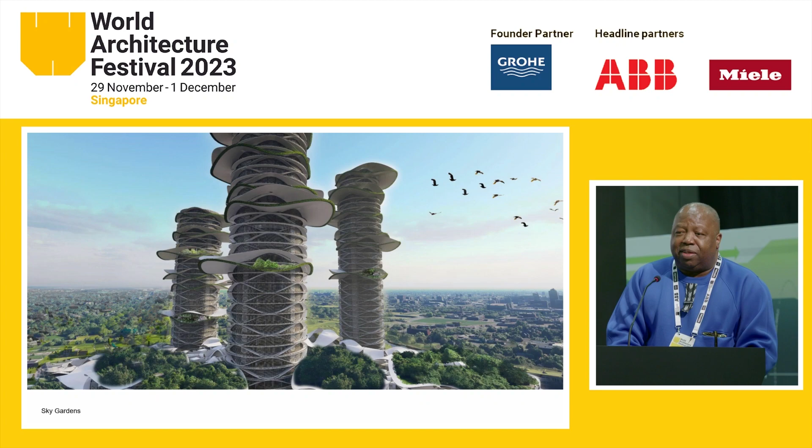We hope that this sort of form could perhaps bring a shared economy between those who have and those who have not, using the cheapest form of land available, that which is never built on. It could become a little oasis, it could be a magnet in its own right, and maybe it could stitch the two sides of the city together—something which every single city in Europe needs to do.

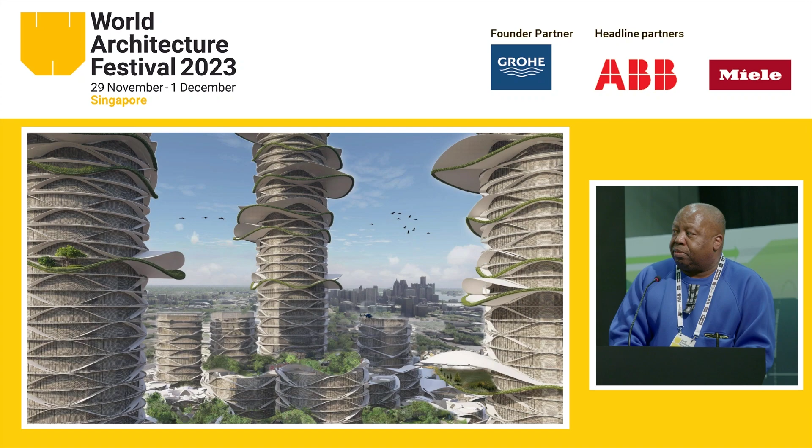Maybe a bit like this.

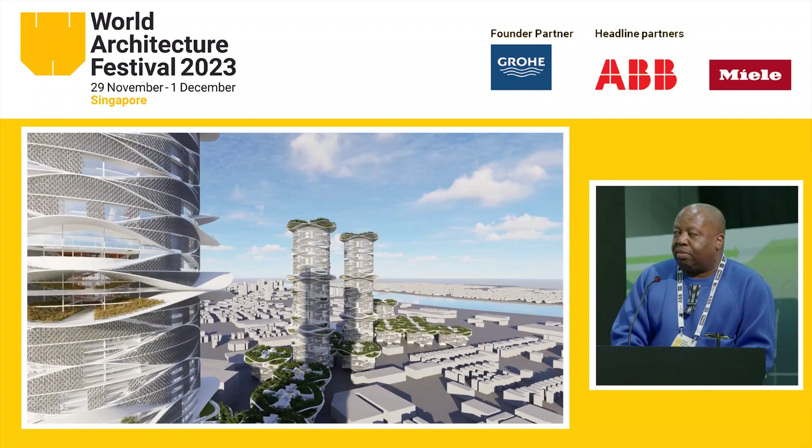So this is at its early stages of what something like this could be like, a different kind of building, a different kind of form. Something to think about, something to consider.